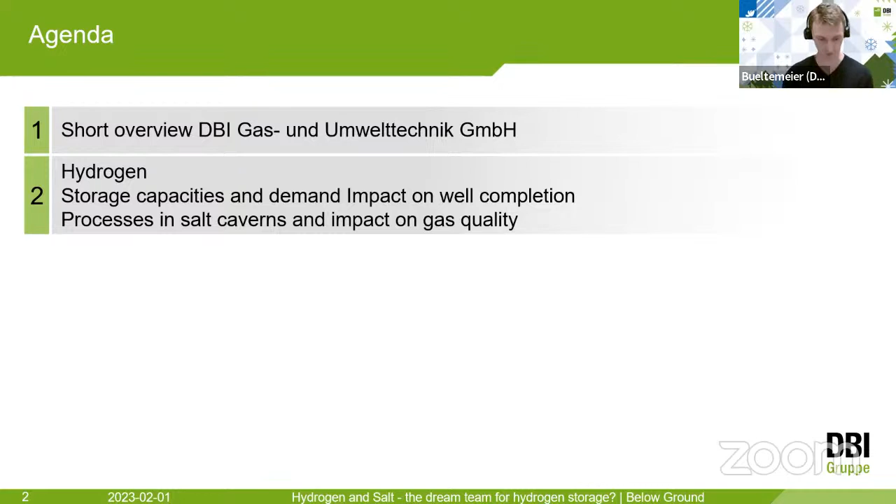The presentation is split into two parts: a very brief short overview of our company and recent activities, and then the big one, hydrogen underground storage, with two distinct focuses - hydrogen storage capacities, and how this impacts our wellbore completion and the caverns themselves - with then in the end a link to the surface facilities where Lorenzo is going to take over.

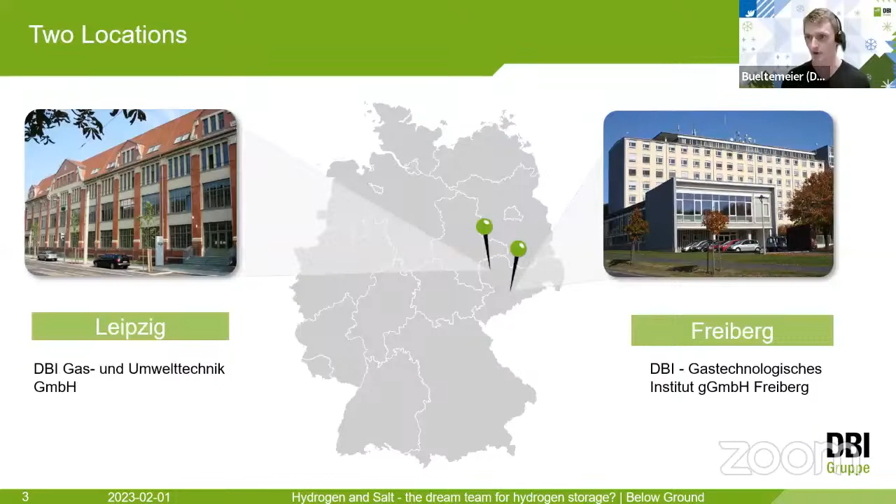Just a few words about our company. We are a small and medium-sized enterprise located in Leipzig. We are a research and development entity, and we also do fundamental research, the latter under our subsidiary, the Gas Technological Institution, which is located in Freiberg, where I myself am also located.

As a company, we always aim to cover the entire value chain of gaseous energy supply. On this screen on the left-hand side, you see a bit of our topics that we work on, but it's just an excerpt, not limited to that, but where we dominantly put hydrogen, and the weight, the balance shifted more and more to renewable energies - that's just what the market demanded. And of course, with our research activities, we always want to stay on the forefront of the developments.

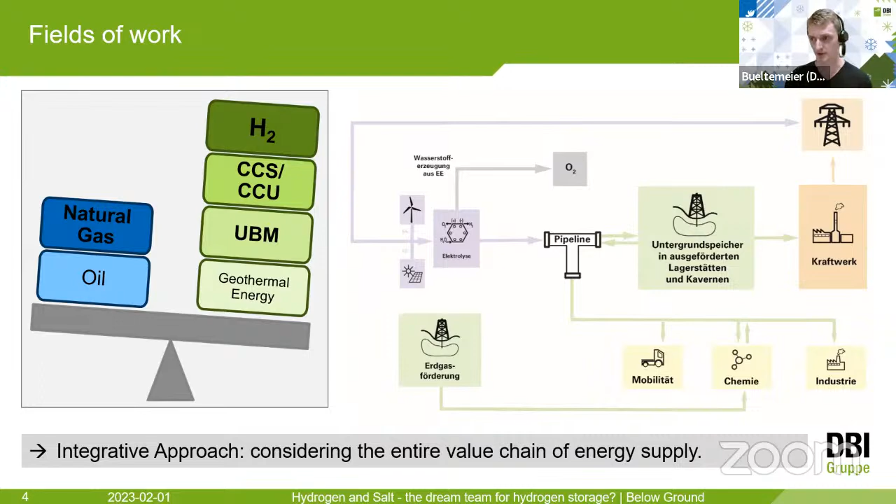On the right-hand side, I showed a brief chart on hydrogen, or general gaseous energy supply, from production to distribution to storage to utilization. And very dominantly, I put the underground storage facilities in the middle of it because we consider them a vital backbone, in also the current energy system, but also in future energy systems with renewable hydrogen.

One very recent example of that in the practical real world is the REAL - in Germany we call it Reallabore. You might have heard this term, real labs, loosely translated in English as large research project, but in an actual cavern on hydrogen underground storage as a backbone for regional energy supply for various customers, the first one of this kind.

Currently, the works are ongoing in the surface facilities, but then in 2025, we will start with the below ground works and have the cavern ready by 2026.

Very nice event. Okay, let's get started into the main part. This slide you might pause by yourself when reviewing the stream afterwards. Just some political figures on why hydrogen is important. For this presentation, I will just go over it.

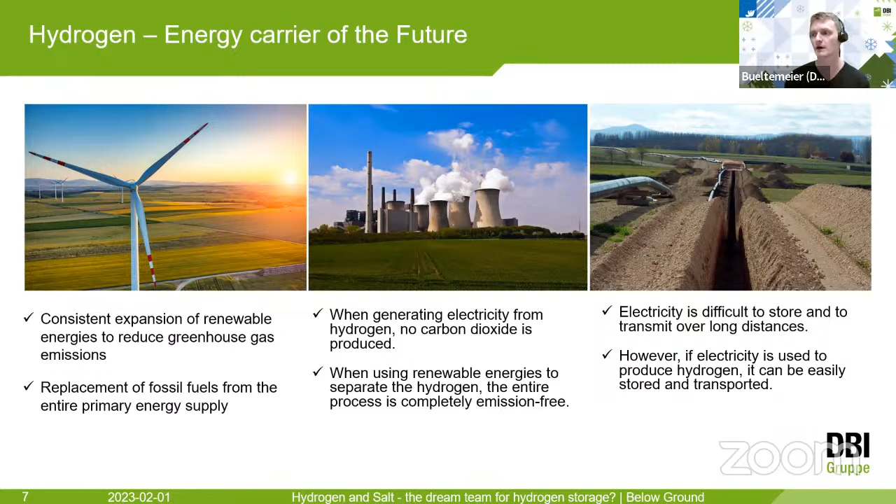But why do we talk about underground storage in particular? What I put here in this chart, borrowed from colleagues around Mr. Sterner, are different storage possibilities. Plotted on the y-axis are the achievable withdrawal durations versus on the x-axis, the overall storage capacities.

There are different options: heat storage, capacitors, pump storages, and in those red bubbles, the underground gas storage facilities. All of those bubbles look more or less of equal size. However, please consider that the scales X and Y are both logarithmic. If you would linearize this, it would be just one large red bubble, so to say.

And this really brings us to the answer of the question, why? It is simply that for regional and long-term energy supply, and as a backbone for industries and entire regions, we really need large capacities in the terawatt hours range. When we're talking about those things, we almost exclusively end up with geological storages.

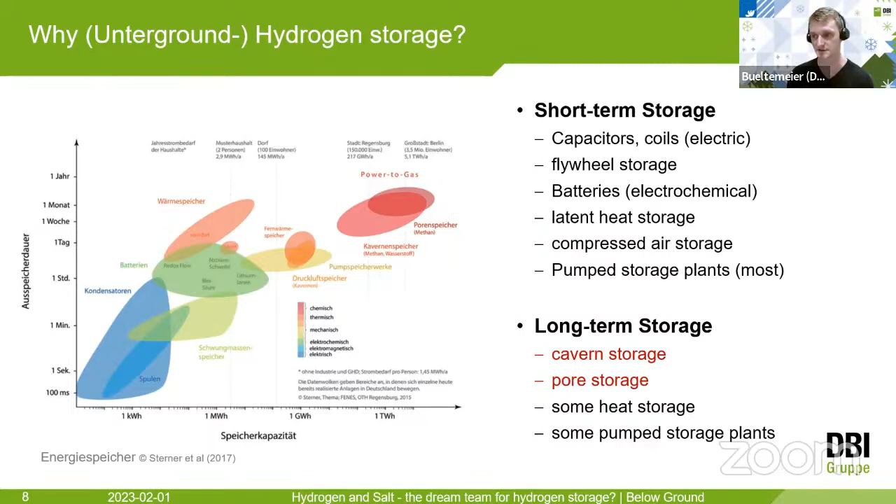This slide, for the course of this presentation, I also go over very briefly. You might pause the stream if you like, or during upcoming review. Some characteristics, the main characteristics of the two different types, porous UGS and cavern UGS. I highlighted in the cavern UGS those features that make them particularly interesting for hydrogen storage.

Easy adjustable withdrawal and injection rates, by means of tubing diameters or simply number of caverns. Lower effort for gas treatment, and very flexible in terms of operations - they can easily switch from injection to withdrawal and vice versa in very short term.

The porous UGS facilities are more on the baseload application side, and it's also very necessary that we consider them in our investigations and considerations as well, because some countries simply don't have salt caverns. But yeah, salt caverns are of particular interest.

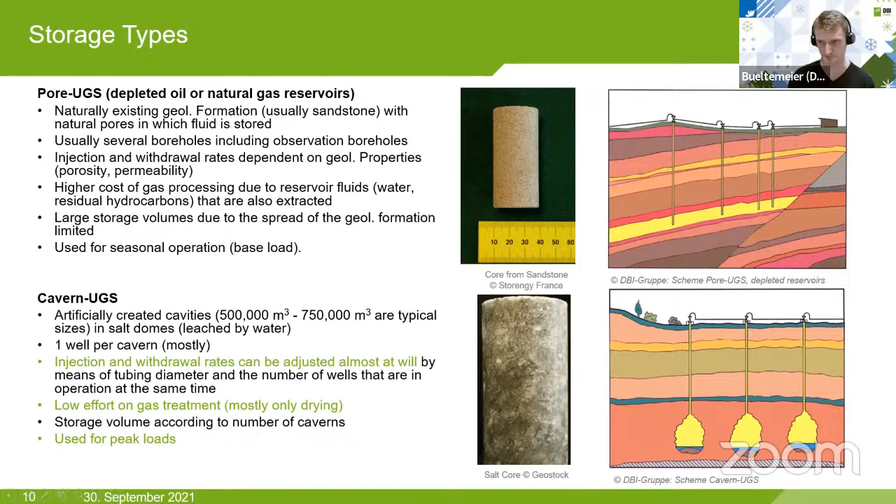Okay, why this focus? I partly answered it already - this question, why salt and hydrogen may be the dream team for storage, is a question raised from a mostly German perspective. Germany in the European Union has the largest natural gas storage capacities, and most dominantly, the largest share of it is in salt cavern UGS facilities. That's a rather unique case compared to Europe or worldwide as a whole.

There, the split is just the other way around - porous UGS facilities are most dominant in basically every other country, up to the point that some countries don't have salt caverns at all. That's also the reason why in Germany right now we are focusing on those caverns when it also comes to the first real-world projects like the Reallabors.

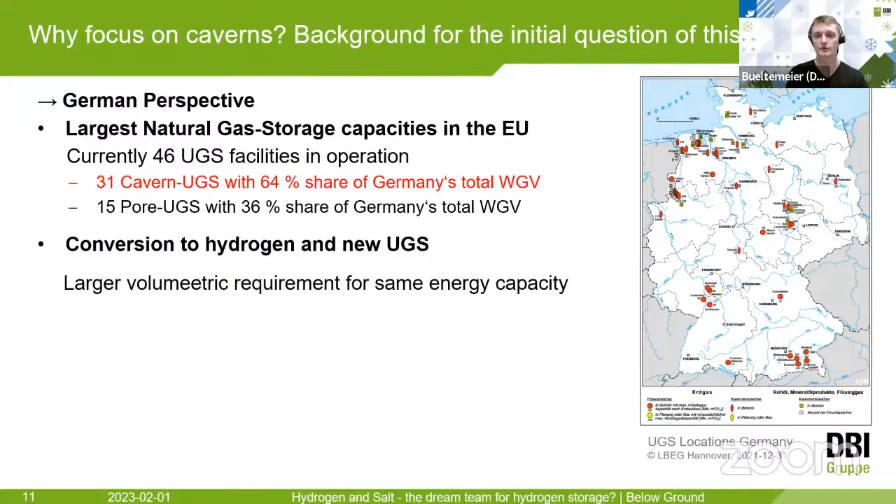But what happens when we convert an existing natural gas storage facility to hydrogen? First of all, for the same energy that we want to store, we need a larger volume. This is reasoned by the heating value that natural gas and hydrogen has - natural gas has approximately 3.5 times the heating value of hydrogen.

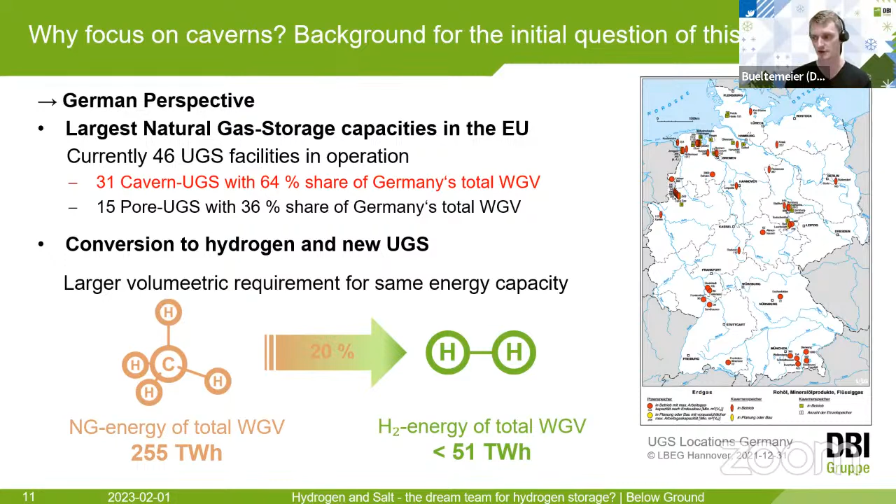And also in terms of just volume, we can store less hydrogen volume in the same UGS facility under the same operating pressures than natural gas. Why is that? Let's briefly get into some mathematics here.

This can be calculated by taking a look at the real gas equations and working out the working gas volumes for natural gas and hydrogen under the same pressure and temperature conditions, but for both gases with their individual Z factors. By comparing the volumetrics, we end up with a factor of 1.6, that hydrogen storage volumes are lower than natural gas storage volumes just due to compressibility. And when applying the heating values, we get again a reduced energetic storage capacity. That's why this 20% is given here.

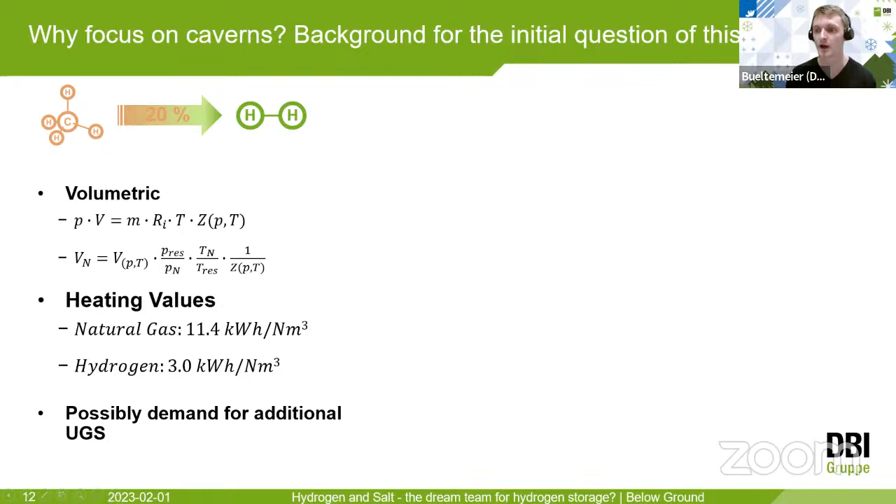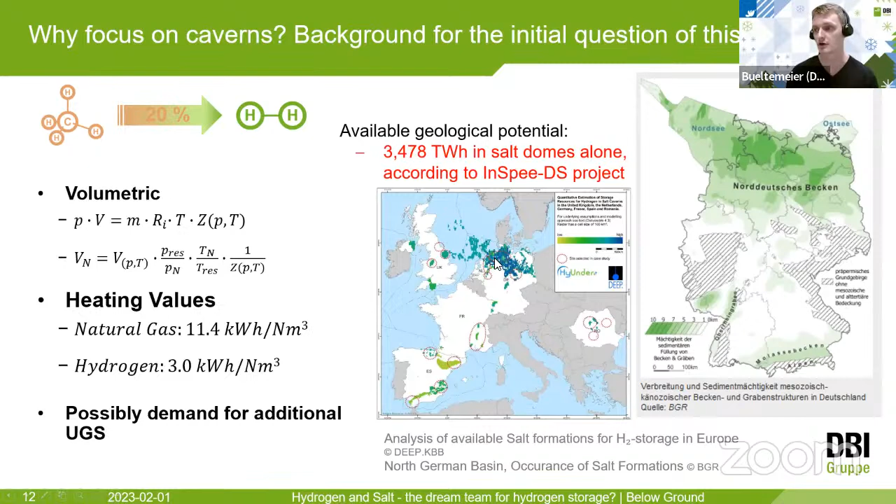So, but how much energy, how much hydrogen storage capacity do we need at all? This largely depends on the demand and how the future energy system will look like, and who are the customers and the utilizers and so on.

Here we can take a look at the long-term scenarios by the Federal Ministry of Economics and Climate, who compiled 3 different scenarios until 2045, and it's somewhat in the range of 47 to 73 terawatt hours hydrogen storage capacity, not consumption capacity. Depending on which number turns out to be the actual one in reality, we definitely would need to either convert all of our facilities and or even establish new ones.

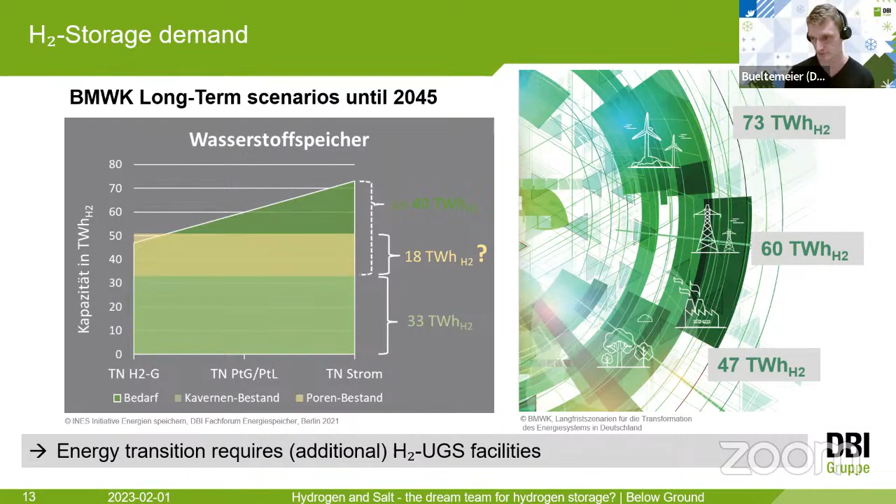Okay, but what does the hydrogen then make with our wellbore installations and the caverns? Let's take a look at the wellbore installations firsthand.

The rather obvious item is that our pressure development in the well will change, since hydrogen is a much lighter medium than natural gas is. And of course, you always have a static column depending on the bottom hole pressure of the reservoir, the operating pressure, the gravity of your gas, and so on. And then you can calculate your wellhead pressures from that.

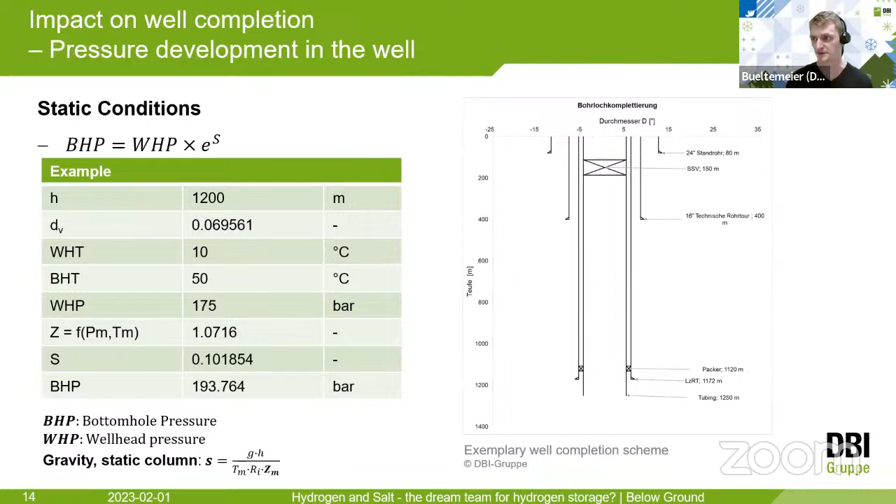The same can be said if you are in actual operations for injection or withdrawal. There you have the static column as well, but also your dynamic friction losses. To visualize this briefly, depending on if you're on the withdrawal side or the injection side, your pressure behavior in the well changes. So far, so good—this is the same story for natural gas and hydrogen.

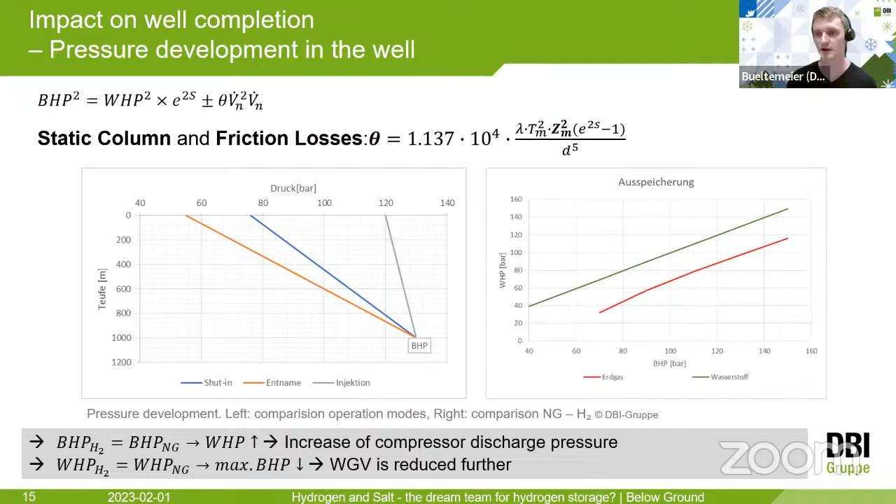But since hydrogen is a much lighter medium than natural gas, we can take a look at the right-hand side for comparison. What we quite clearly see here is that for the same bottom hole pressure, we always end up, regardless of where we are, with a higher wellhead pressure. This has a profound impact on our above-ground installations, in particular during injection on the compressor discharge pressure. And in case a compressor cannot deliver the new required maximum wellhead pressure, then we can even store less volume.

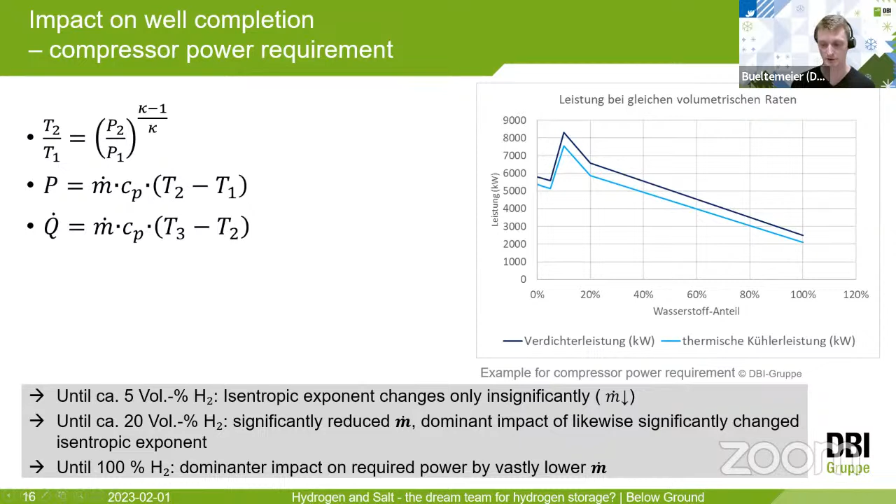However, in between, the impact of the isentropic exponent is much more significant, and that's also the reason why the power requirement has this significant peak here, which seems a bit odd if you just look at it. Okay, here's some explanation about the variables.

Long story short, we end up with a different pressure and a different load in the wellbore, which means we need to take a closer look at the stress our wellbore experiences—radial, tangential—and in the end develop an equivalent stress calculation. The Mises approach is very common here for subsurface applications.

We need to reevaluate our safety factors. If we have different loads in the well, we need to see if the previous safety margin for natural gas storage is still given. We are now in the field of converting existing facilities. Of course, when you build a new one, you would design from scratch.

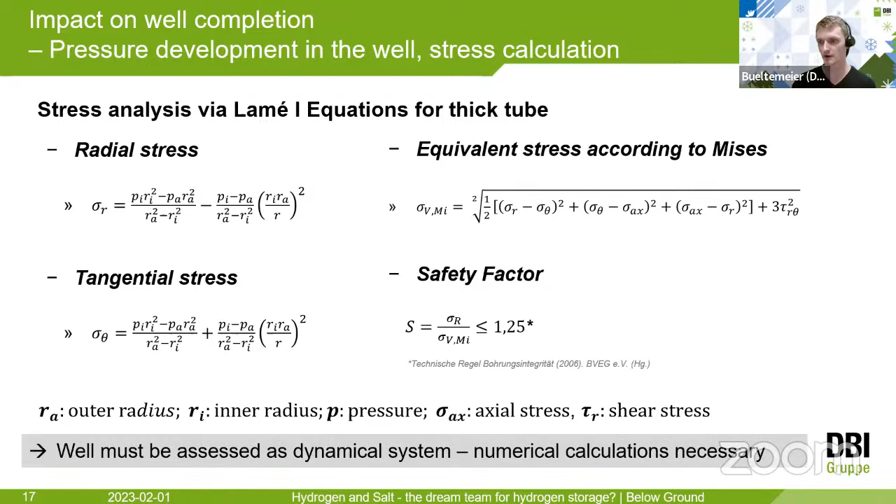For such assessments, you can build numerical tools for very dynamic considerations, combining the wellbore, the cementation, and the surrounding rock—inner stress, outer stress, and so on. It's a rather complex calculation over the length of the entire wellbore.

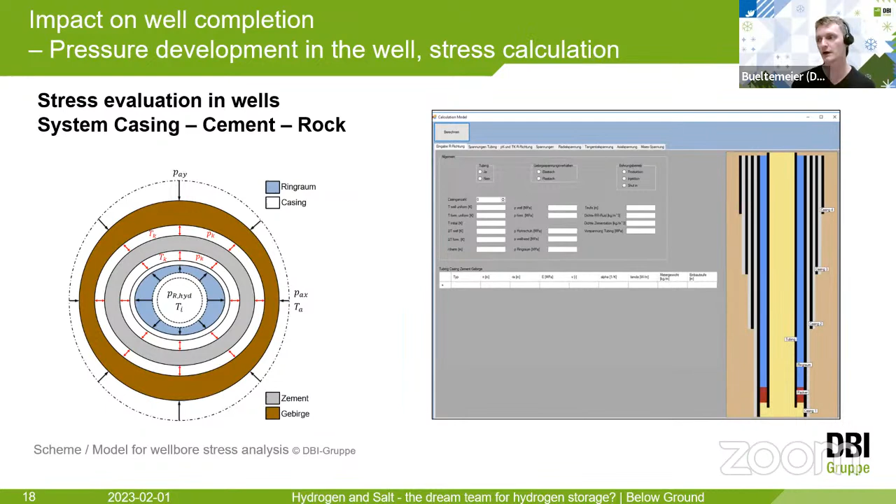I just put here a screenshot from an example model that we usually use and feed with different input data. After the wellbore—and I know it's very brief, sorry for that—we need to take a look also at the caverns themselves and how the salt reacts to our storage operation.

It is very likely that storage operation becomes much more multi-cyclic in the green hydrogen world compared to natural gas, because wind is not always blowing, sun is not always shining—it's very fluctuant. This means we need to utilize different injection and withdrawal patterns compared to natural gas, where we have an annual cycle.

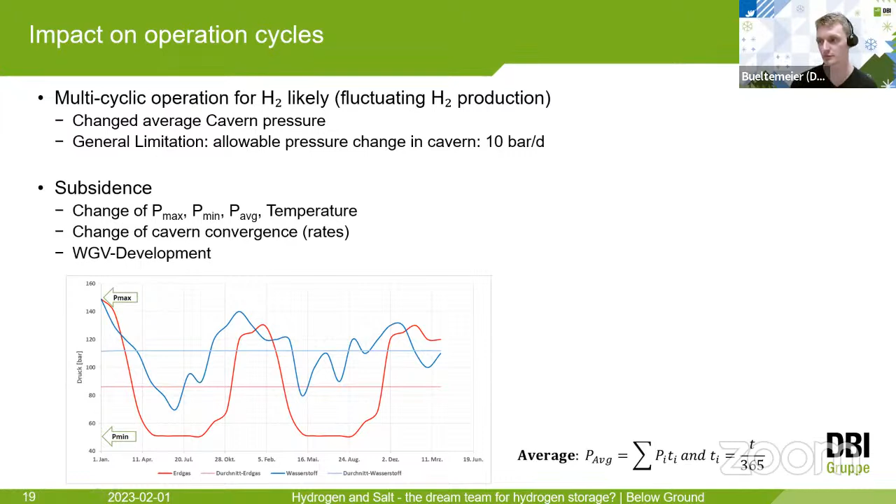This change in the average cavern pressure has a profound impact on cavern convergence and also on surface subsidence resulting from cavern convergence. We can go into more rock mechanical details if you have particular questions about it. Right now, I can only mention it.

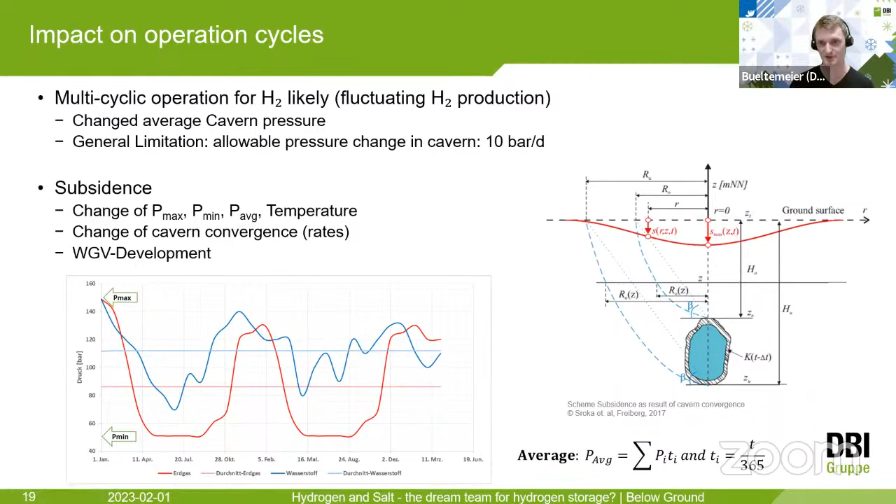But speaking of rock mechanics and cavern stability, we also need to make some additional assessments there, since our salt cavern needs to provide long-term stability. We need to determine our minimum and maximum operating pressure.

We need to determine how many caverns we could put in the salt dome, what distance they need from each other, what distance they need from the caprock, and so on—just to stay safe mechanically, and also stay technically tight, providing safety against uncontrolled gas migration from the cavern to anywhere we don't want to have it.

This is usually done by lab testing from core samples. I put here some charts from a finished research project called H2UGS, where we did such lab testing accompanied with numerical simulations from a partner institution of ours, investigating different loads on various critical points of the cavern.

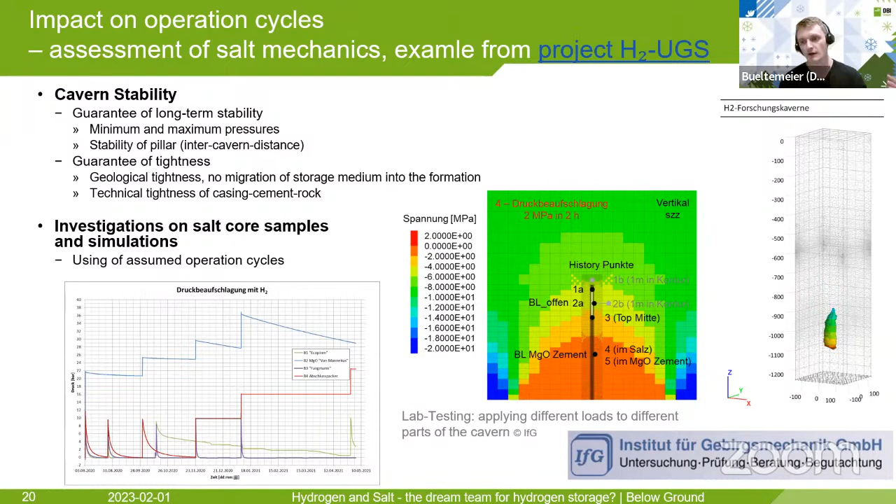Salt in the cavern itself, at the very top of the cavern, and cement at the LCCS—maybe detailed questions later on that. Those load cycles had been applied to the anticipated operating cycles to represent them.

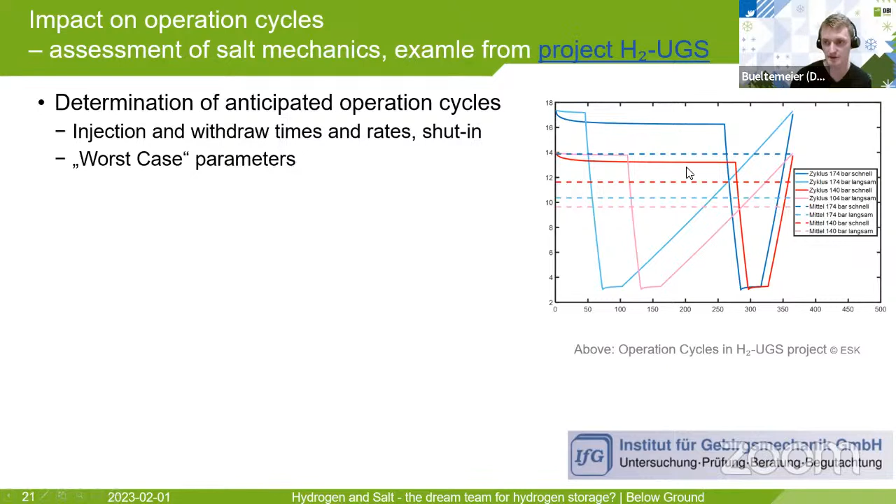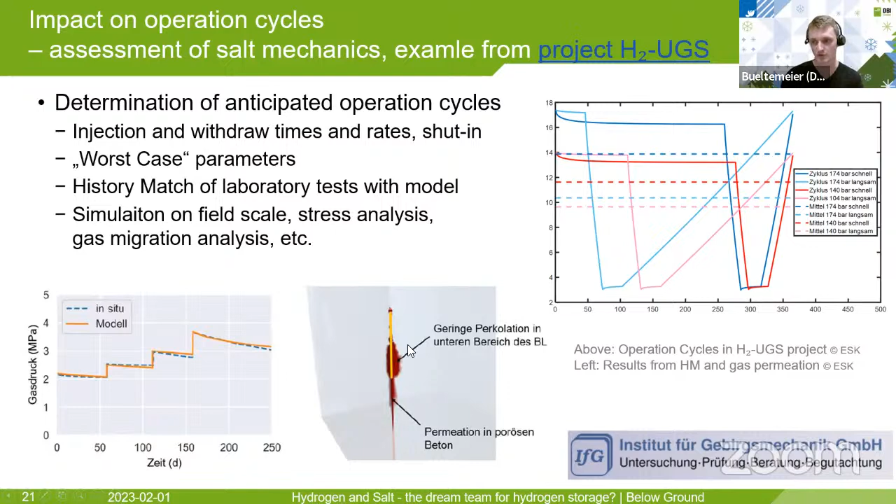What you need to do then is history-match your numerical model with the laboratory data, and then scale it up to a real cavern model, including also the surrounding rock. Then you can analyze your stress and also analyze other things like gas migration into the rock matrix, an example I just plotted here. Then you can work on your operating pressures and loads and so on.

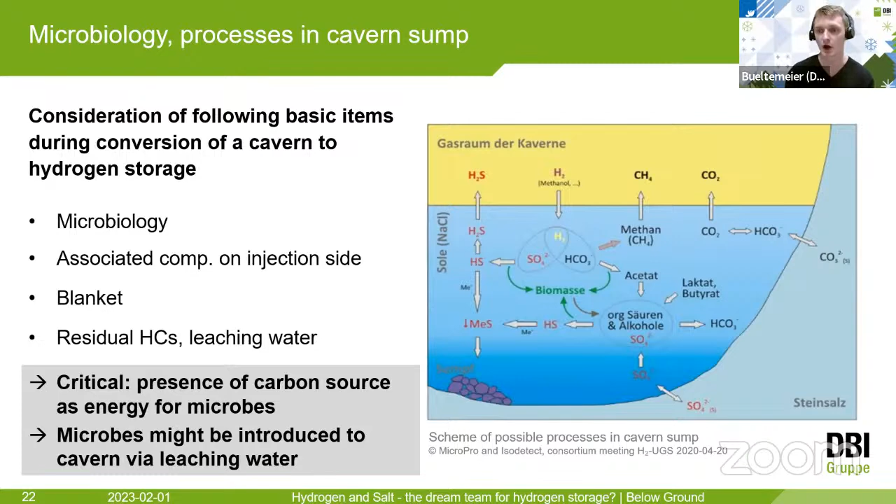But those processes can be triggered by the availability of a carbon source, which serves as a nutrient to microbes, and then some conversion processes can go on that we don't want to have. It's important to consider this when converting a previous natural gas cavern, or an oil cavern, or if you use the diesel blanket during the leaching process during construction.

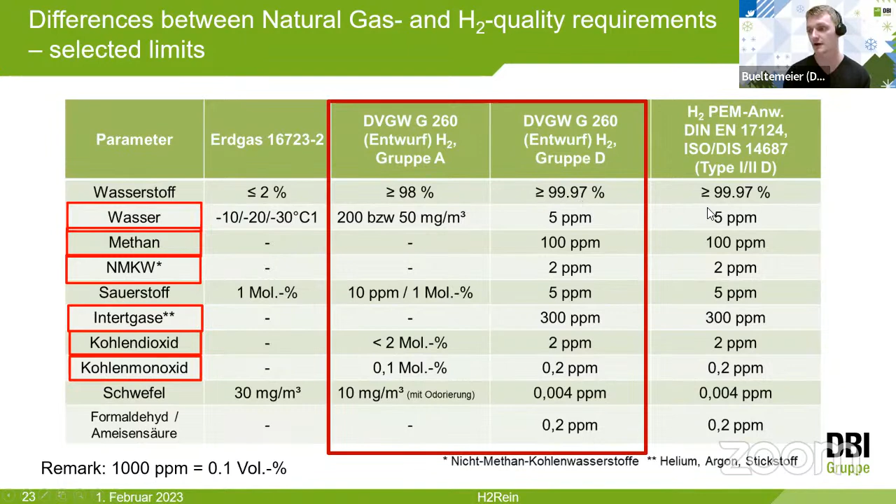This again has an impact on the necessity for gas treatment. There are different quality grades in current discussion in Germany: grade A and grade D. Grade A is rather easy for common methods of treatment to achieve, but grade D, when we're looking into purities of more or equal to 99.97%, it's really getting a bit more tricky.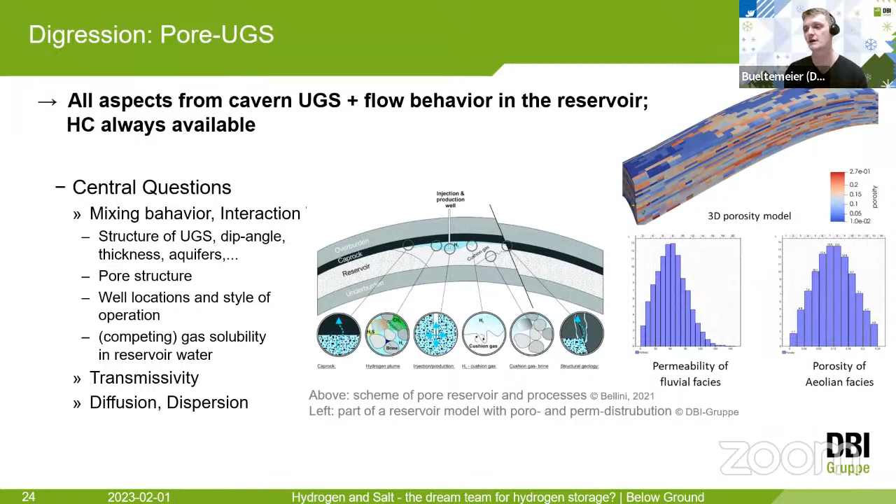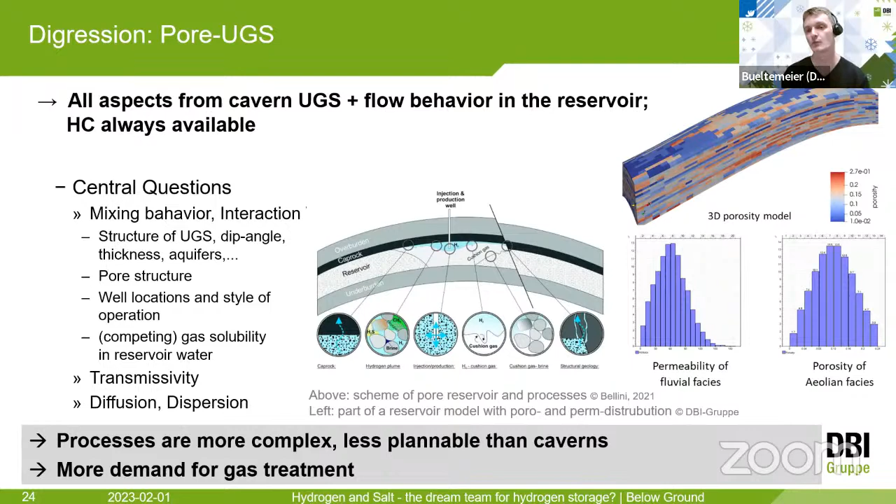So, is this exclusive to caverns? What about porous UGS facilities then? Just a quick distinction: we have all the considerations that we need to undertake in caverns, and also the flow processes in porous media. Overall, porous UGS facilities are much more complex to analyze. It is necessary to do that, but salt caverns are the easier storage type, a more flexible storage type.

And to wrap up, here's just a picture of the ongoing activities in Germany, lots of real labs, Bad Lauchstädt being the one on the cover photo, and some others here in North Germany, obviously, but there are also others in the Netherlands, in France, and other countries as well.

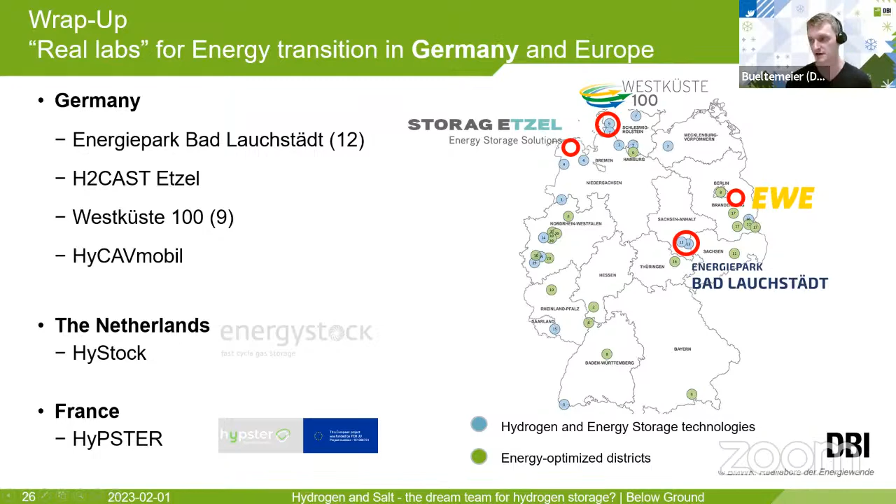Maybe I'll just give you 15 seconds to take a look at those bullet points here to wrap it up. My point of view is there was a lot of fundamental research going on in the last years, and we are currently at the point in time where it's simply necessary to get into the field, make new experiences there, and push the topic forward.

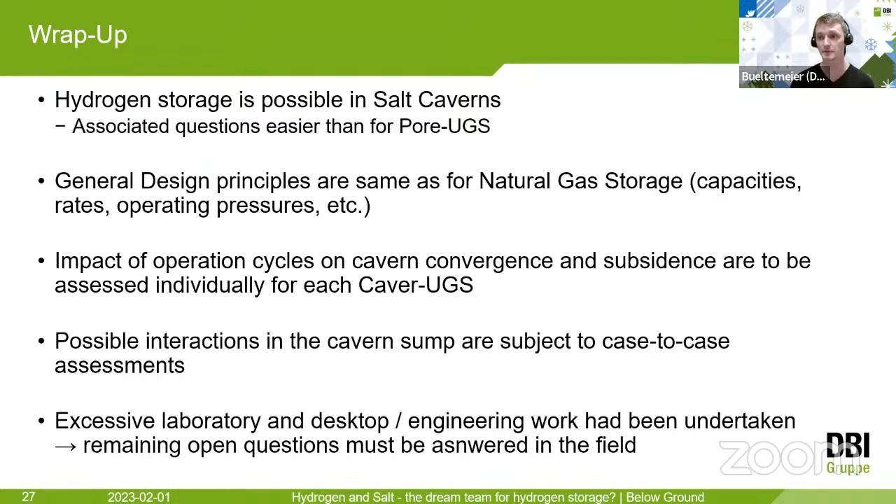And with this slide, I mentioned it in the previous ones: gas treatment and compressor. Those are the links to the above ground installations. And without further ado, this shall be the transition slide.

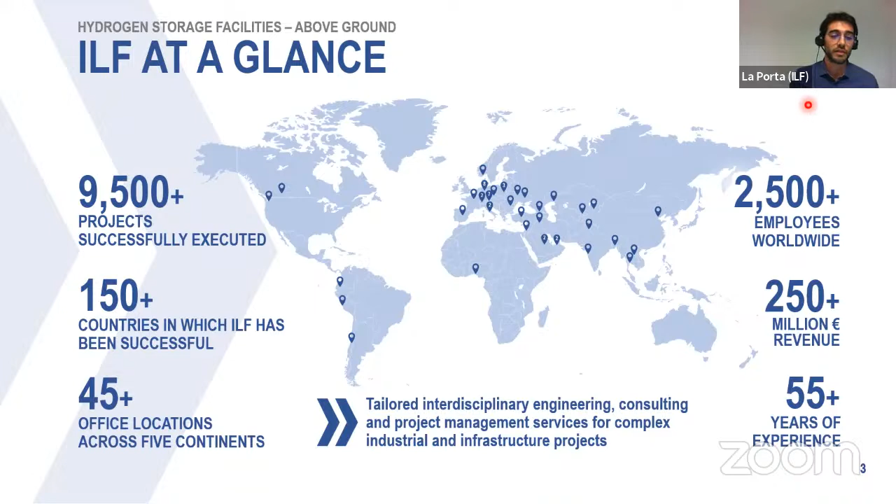ILF is an international engineering and consulting company, active in more than 150 countries with more than 45 offices around the globe, 9,500 projects successfully executed over more than 55 years. We operate in 4 main business areas with more than 2,500 employees and 250 million euro of revenues. We are active along the whole hydrogen value chain.

Why hydrogen value chain? Because green hydrogen generation starts from renewable energy production. Then it's important the transmission of energy, and important the desalination to provide desalinated water to the electrolyzer. Then the hydrogen production itself can be later converted into green derivatives. It can be stored, it can be exported. Here I mentioned some projects ILF has been working on relative to the whole hydrogen value chain.

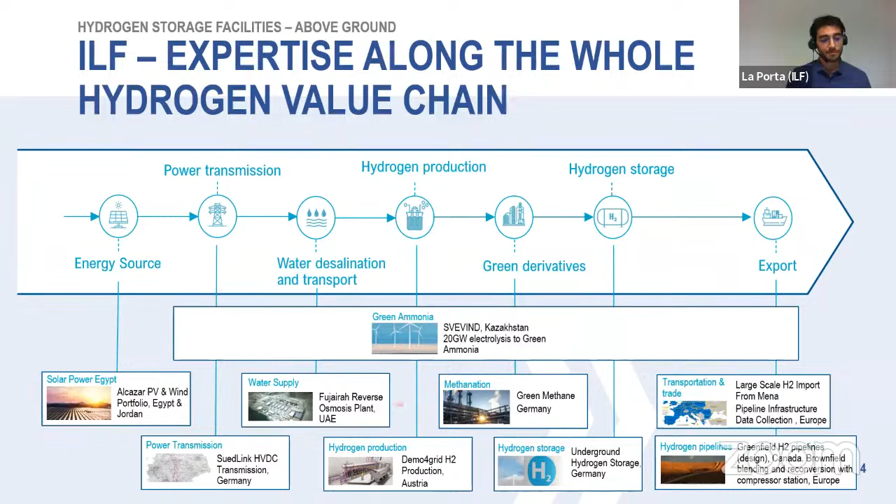Well, why do we talk about hydrogen value chain? Hydrogen is an energy carrier that can be used to store renewable energy in its chemical structure. It can be reconverted into electric energy if needed, and transported in different forms, also over long distances. Because of the fluctuating nature of renewable energy production, and therefore hydrogen production, daily and seasonal hydrogen storage is necessary. That's why we're talking about hydrogen storage, and in particular about the above ground facilities of an underground hydrogen storage.

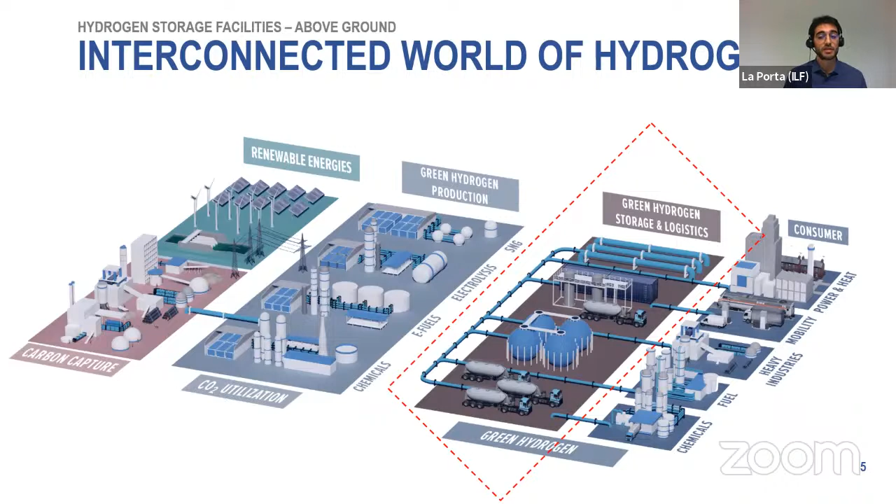So let's first look at the facilities needed for an underground natural gas storage to better understand the standard technology, and then we'll look at the differences required for hydrogen storage, to understand what it takes to reconvert an underground gas storage to an underground hydrogen storage.

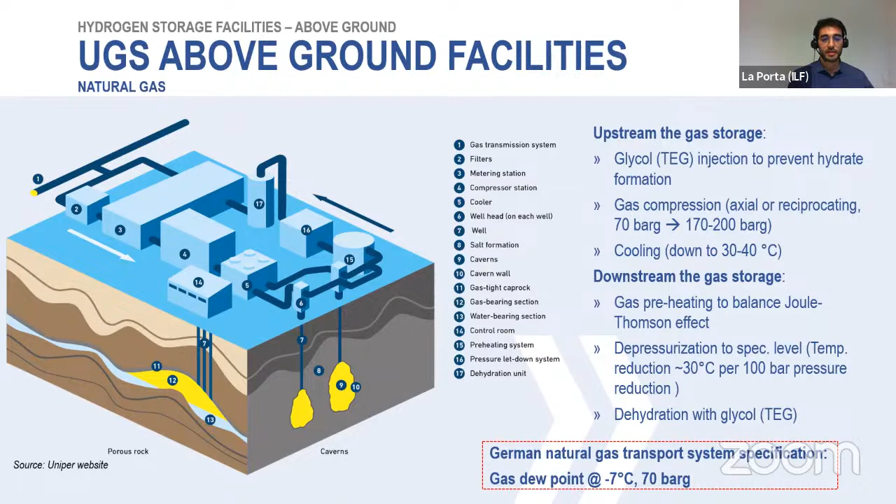Now let's look at the underground hydrogen storage facilities and see the differences. The main differences between hydrogen and natural gas storage above-ground facilities relate to the compressor type, the fact that no preheating is needed before depressurization because the Joule-Thomson effect for hydrogen is different - a pressure reduction leads to a slight heating of the gas rather than cooling like natural gas - and the different dehydration technology that can be utilized. The type of facilities mainly depends on the type of underground gas storage and the specification regarding hydrogen quality.

As described before, there are different kinds of underground storage: salt caverns, depleted oil and gas fields, and I added lined rock cavern, an artificial cavern that could be used in specific cases. The hydrogen quality specification depends on the end user. For example, the gas network has a dew point specification of -7 degrees at 70 bar G, which could also apply to hydrogen. Whereas if the end user is a fuel cell plant, we'd have a different hydrogen purity requirement, typically higher than 99.9% mole purity on a molar basis.

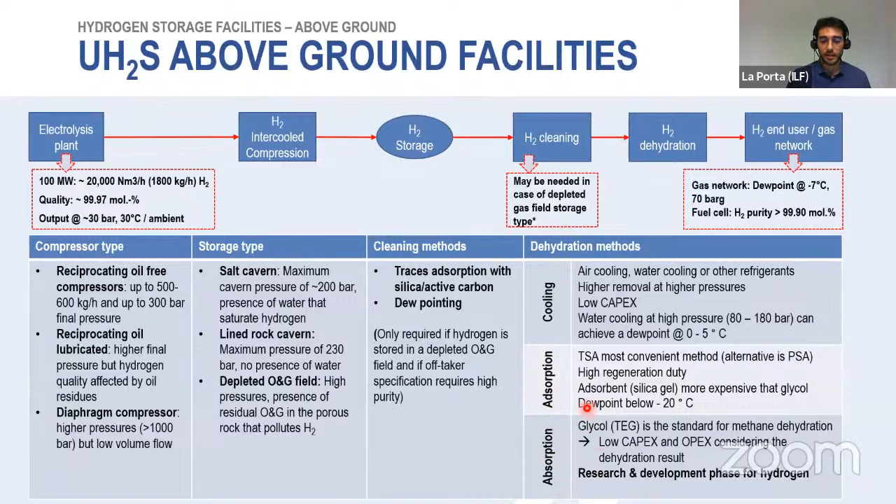This is a typical example of hydrogen storage facilities. We at ILF have been working on this kind of project, so let's see what we have here. After the electrolysis plant, hydrogen goes into a buffer, whose main purpose is the startup, to match the startup of the electrolysis plant and the compressor.

We then have the compressor unit, intercooled, which is typically a reciprocating compressor. Hydrogen is then stored, in this case in a salt cavern. When extracted, it can be cooled down at high pressure, and water can be separated with a separator. If a lower dew point is needed, a temperature swing adsorption unit can be added before delivering hydrogen to the end user.

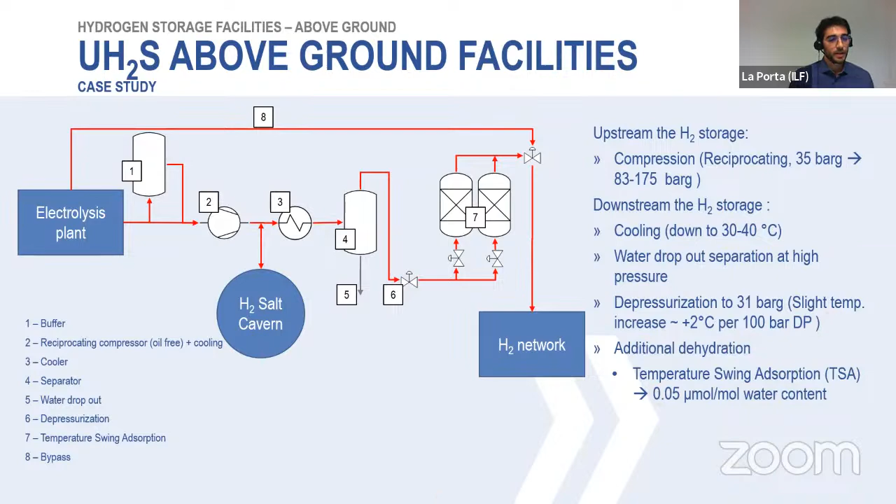Very good. So I tried to wrap up these questions, which I received many times, regarding reconversion of underground gas storage facilities to hydrogen.

Let's see the first: can a natural gas axial compressor be utilized for hydrogen? The answer is no. An existing axial turbo compressor cannot be used for hydrogen because of the different physical properties. As I said before, a new generation of axial compressor is being developed and will be available soon.

Whereas if our underground gas storage is using a reciprocating compressor, could this compressor be reused for hydrogen? This option could be possible. Of course, the compressor will not operate at the optimal design condition, but definitely the option could be considered.

Let's now have a look at this question regarding dehydration. So if we have existing drying facilities for natural gas, would it be possible to reconvert these existing dehydration facilities for hydrogen?

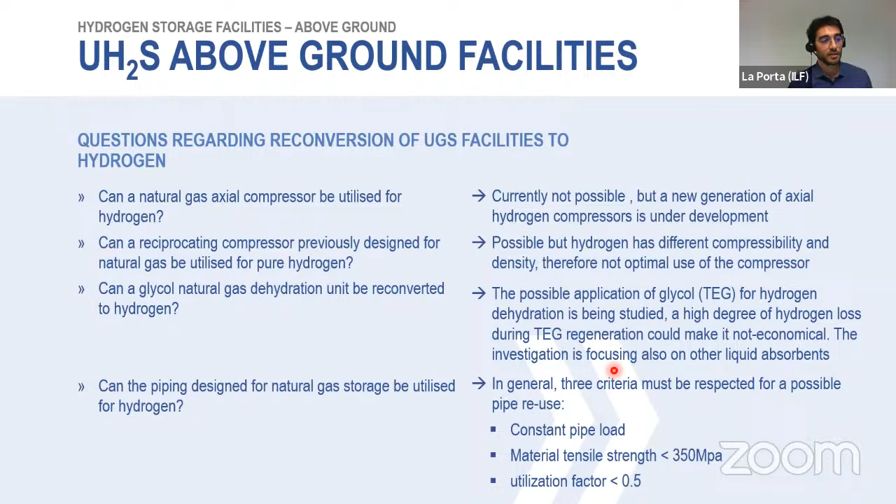The pipes would need to be used at constant loads, made of soft metal with a tensile strength lower than 350 megapascal, and the utilization factor would need to be less than 0.5. If these criteria are not respected, then further investigation should be performed. And in case the investigation gives a negative result, then the pipes would need to be replaced.

This is an example ILF has been working on. We've been doing the conceptual design and the basic engineering for an underground hydrogen gas storage, a small one. We see here the capacity of 17,000 cubic meters, quite smaller than the capacities Hagen mentioned before.

The purpose of this storage was to store hydrogen for a 30 megawatt electrolysis plant. With this maximum cavern pressure of 175 bar, the compressor unit can process up to 6,000 normal cubic meters per hour, two stages intercooled, with 0.7 megawatt peak compression power, and the dehydration unit could reach this dew point specification: 5 degrees C at 31 bar G.

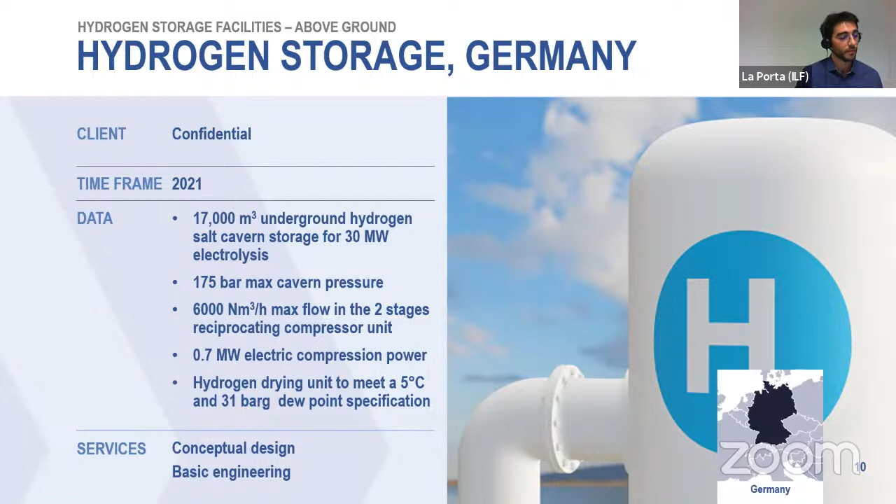So conclusion: the challenge related to above ground hydrogen facilities needs to be addressed, so that the type of above ground facilities depends on the kind of underground storage. That's the first thing to be considered, and that's the main parameter, the main point that will determine the kind of facilities.

Then another challenge is the reconversion of previous natural gas storage into hydrogen storage. The reconversion may require substituting at least the compressor and the drying units. The technology to process high amounts of hydrogen in the same order of magnitude as natural gas is still under development, and now I'm talking about the compressor unit and the dehydration unit.

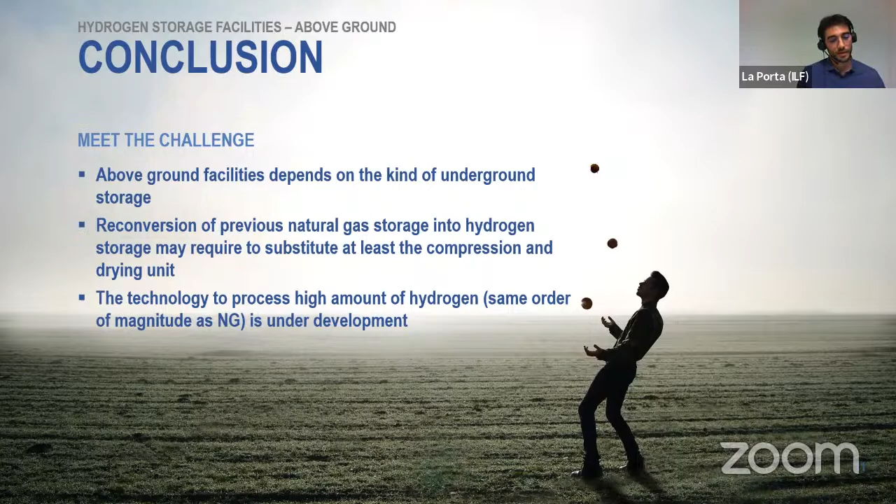Okay, Lorenzo La Porta, thank you very much for this very interesting presentation. Now we do understand that this is quite a challenge to convert natural gas storage facilities, also the above ground facilities, into a hydrogen storage facility. But nevertheless, the work is on the road, and we will see in the years to come that this technology and this challenge will have solutions available. With this, let's come back afterwards when we have a short roundtable discussion with all of us.

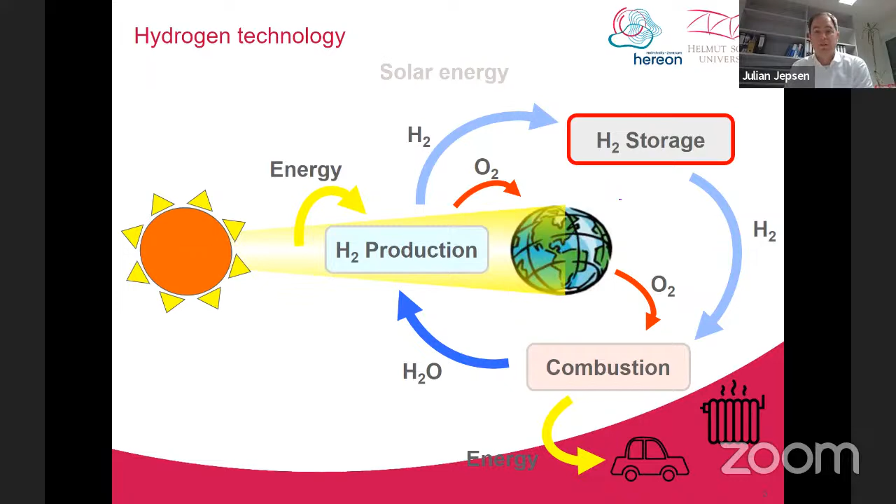I'll skip the introduction because obviously hydrogen technology is of key interest for all of us. I just want to point out that hydrogen technology is complex but doable, as was also seen in the presentation before. Some challenges remain, particularly for hydrogen storage, and here hydrogen storage by metal hydrides can be a solution, at least for some applications.

Natural gas and gasoline energy carriers are very high concerning their volumetric energy density. This cannot be reached by lithium-ion batteries, for instance, but it also cannot be reached by hydrogen, even though hydrogen from a gravimetric point of view has the highest energy density. This is all for standard temperature and pressure conditions, and the idea or challenge of storing hydrogen is to increase the volumetric energy density without losing too much of the gravimetric advantage. Hydrogen storage in general can be done with different approaches.

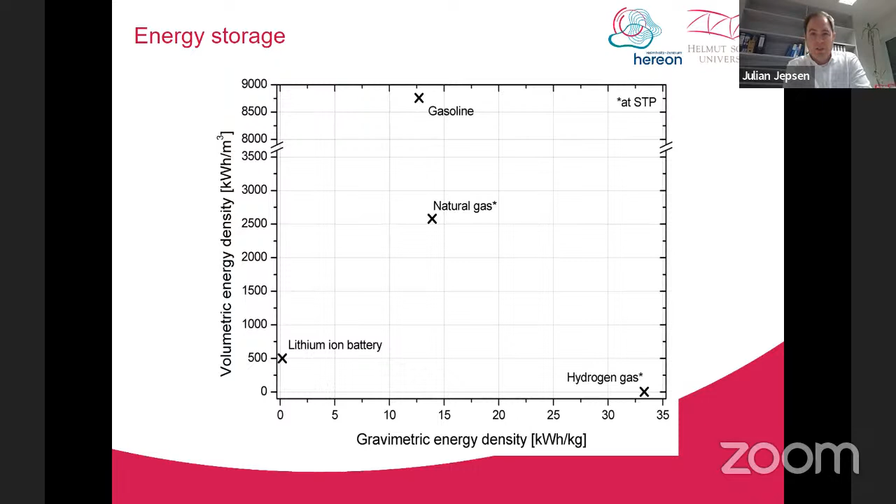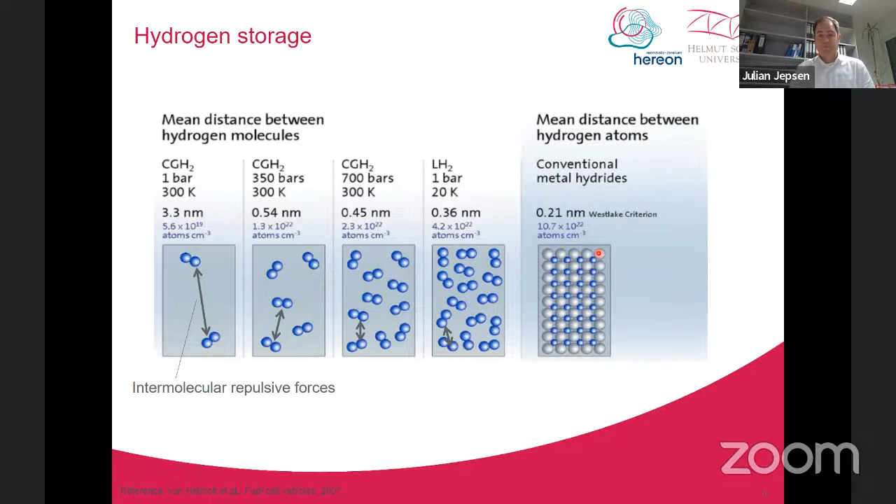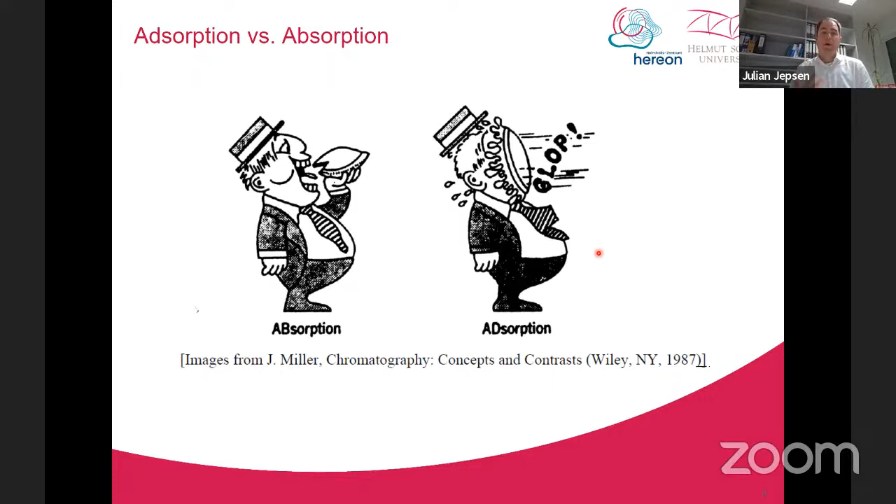It's very important to distinguish between absorption and adsorption, shown here. Adsorption is a typical process where you physisorb something on the surface, but now we're talking about absorption, where the hydrogen really diffuses into the metal lattice. How does this work? Briefly, there's an interaction between the hydrogen and the metal, or host material. First some adsorption takes place on the surface, but once the hydrogen splits into two atoms, it diffuses into the metal and finds its place inside the lattice and host material.

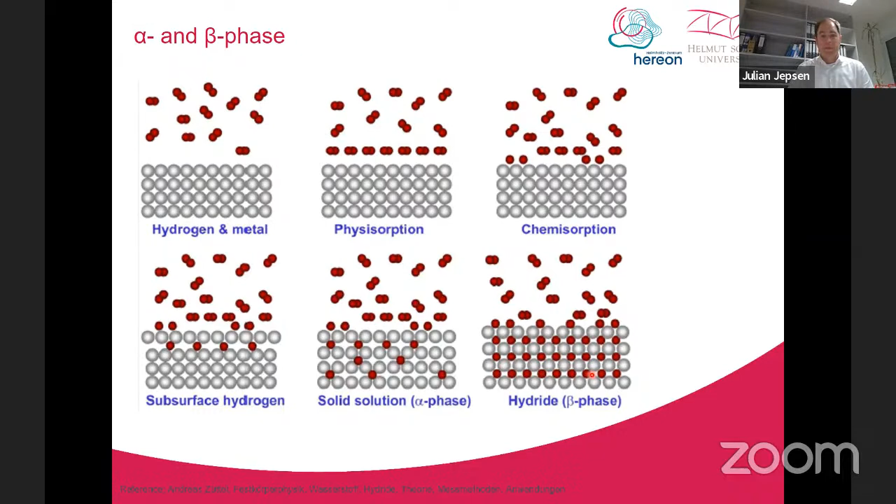This happens at a so-called thermodynamic equilibrium, so it doesn't need further pressure. You have to initially increase the pressure, but once you reach thermodynamic equilibrium, just with a slight overpressure, you get the full capacity of material that can be stored.

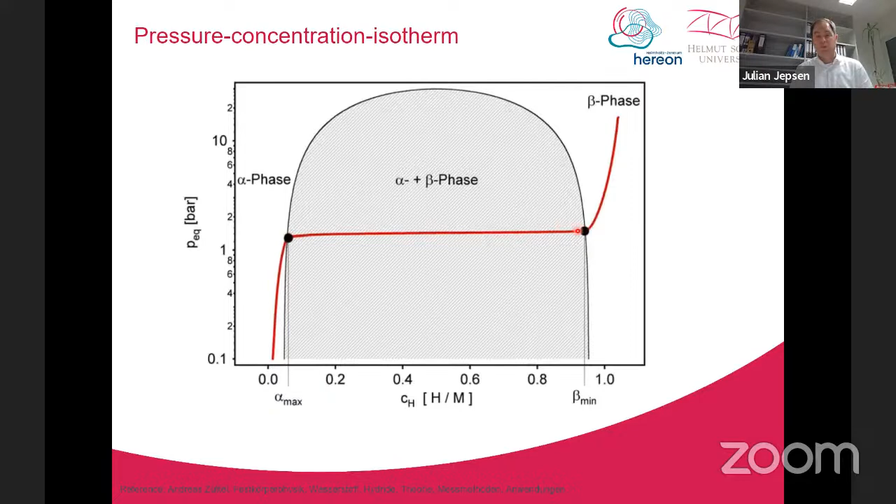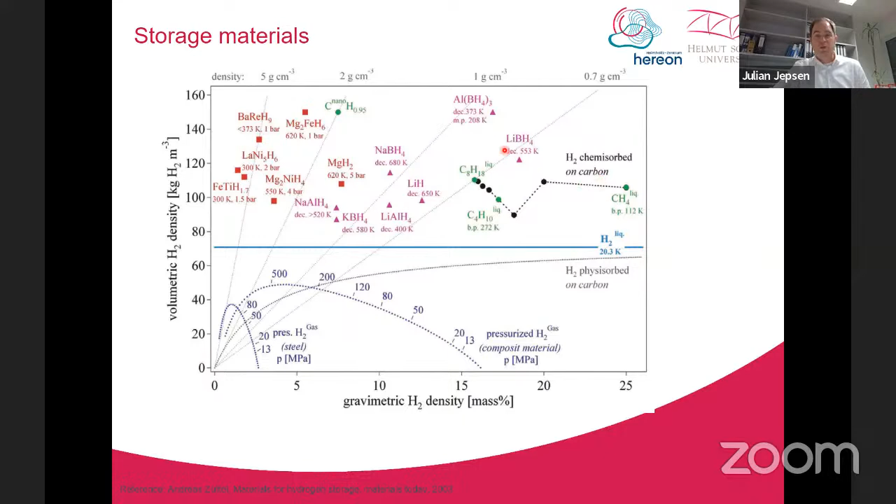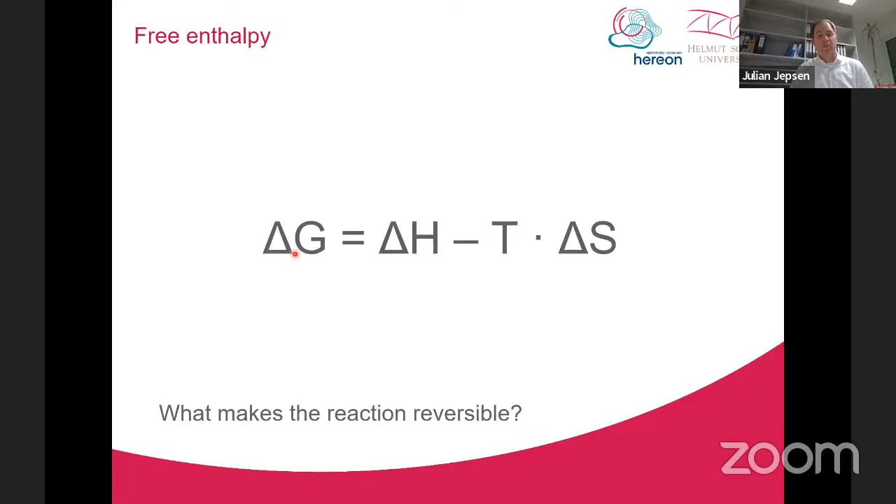So a little bit about the thermodynamics. How does it work? This is shown by this equation, which combines the reaction enthalpy, delta H, with the reaction entropy. Delta G is the combination of both, the free enthalpy, and whenever delta G gets negative, the reaction occurs spontaneously.

So how is this possible? During absorption, we have a negative entropy because we're changing from a chaotic orientation in the gas phase to a well-ordered orientation in the solid phase, and this usually comes with negative entropy. So this term gets negative, and with the minus sign it has a positive contribution. However, due to a negative delta H value — because absorption is an exothermic process — we end up overall with a negative delta G value. Usually the contribution of the enthalpy is much higher than the contribution of the entropy.

But if this is the case, for desorption — the release of hydrogen — everything works the other way around. During desorption we now have a positive contribution: the hydrogen goes to its more favored state, the gas phase, and we have a positive contribution from the entropy.

So with this negative sign here, we get a negative contribution to delta G. However, as I mentioned, if the absorption is exothermic, the desorption is an endothermic process, so we have to provide heat for this reaction. And since the contribution of the enthalpy is still higher than that of the entropy, we end up with a positive value for delta G.

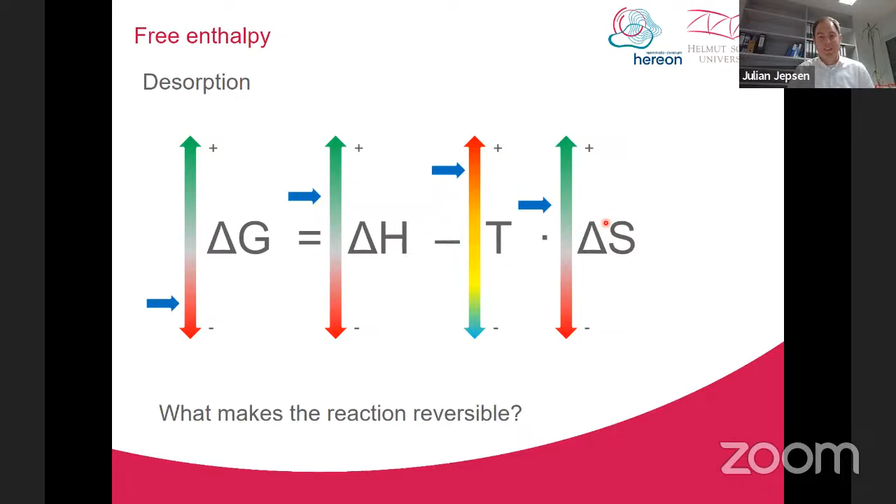What we just saw is basically without any effect of pressure. If you draw a straight line here, increasing the temperature, on the x-axis, leads to desorption, while at lower temperatures you are in the absorption region. In real life it's a bit more complicated because pressure also matters, but it's just as simple as with temperature: at low pressure you're desorbing, and at relatively high pressure you're absorbing.

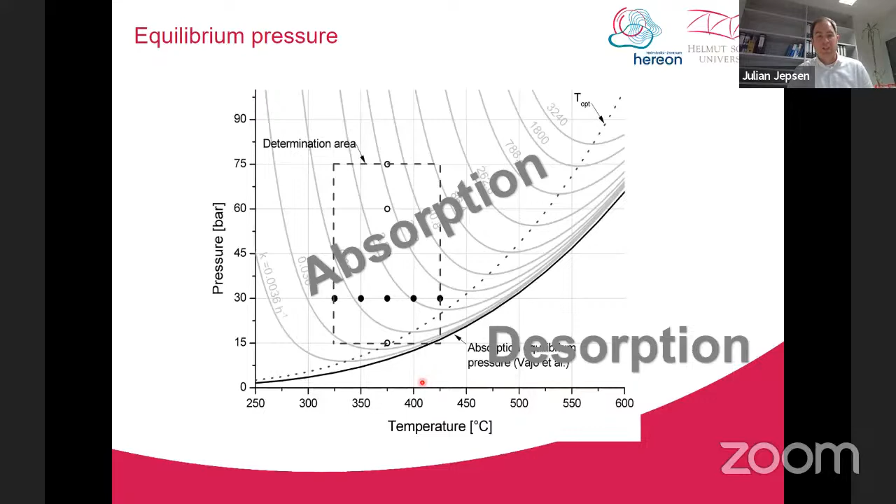So now, by playing with temperature and pressure, you decide whether you absorb or desorb your material. However, this takes place, depending on the material you choose, at much moderated pressure and temperature conditions. This is shown here for an example of high temperature hydrides. There are also hydrides that absorb and desorb below 100 degrees C.

So why is this so important? Why is it interesting? Thermodynamics is actually something we can trigger, something we can tailor. Usually a high enthalpy of formation stands for high stability and thus a high temperature of operation. So if we want to destabilize this, we have to destabilize the alloy. This can be done by elements that can form a stable compound with the metal, but not with the hydrogen.

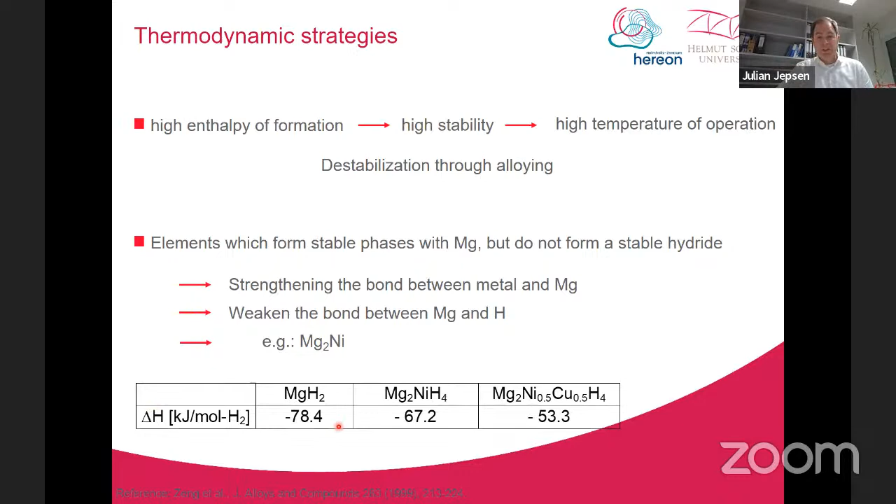So for instance, in this example, we have magnesium. Magnesium is a well-known and very good hydrogen storage material. But if you alloy some nickel, or some nickel and copper, you reduce the enthalpy, as you can see here. This reduction in enthalpy leads to a further reduction of the thermodynamic stability, which also affects the equilibrium pressure, so you can absorb or desorb the hydrogen at much milder conditions.

But this is just thermodynamics. One more example, and then I'm done with thermodynamics. You can also combine two different metal hydrides, as shown here for the example of magnesium hydride and lithium borohydride. They are both well-known hydrides with relatively high capacities. 7.6 weight percent means that if you have 100 kilos of material, 7.6 kilograms of hydrogen can be stored inside, and here it is even more than that.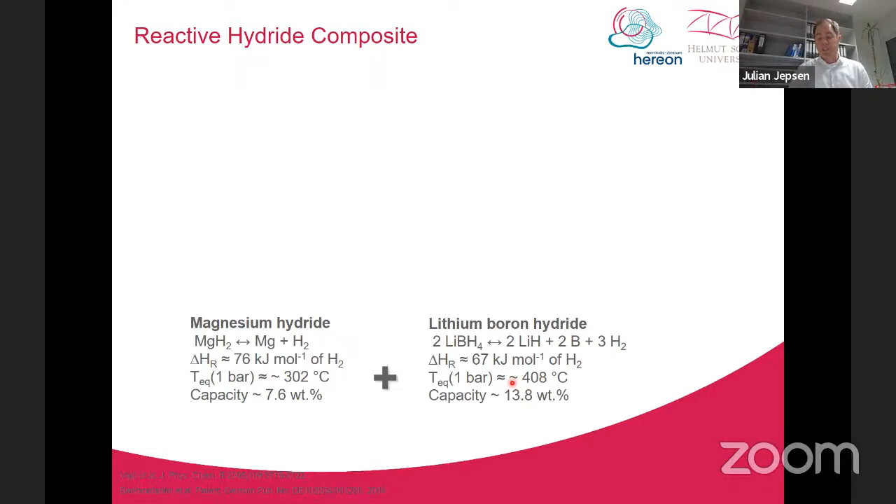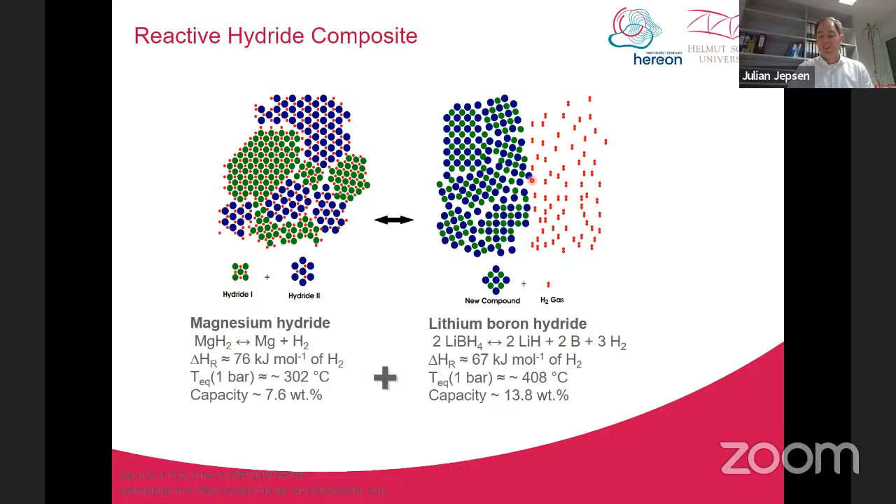However, they both have a rather high enthalpy, and are stable compounds, leading to relatively high temperatures of operation. If you combine these two hydrides, during the reaction a further reaction occurs and a new compound is formed. This new compound can take part of the energy necessary to get from the hydride phase to the dehydrogenated phase. To give you real numbers, if you combine these two materials, you end up with a reduced enthalpy, so a reduced stability, a much lower temperature of operation, and still a relatively high hydrogen capacity from the gravimetric point of view.

This is thermodynamics, and now if you want to look at a real tank system, we also have to consider reaction kinetics, because thermodynamics just tells you whether a reaction takes place and what temperature and pressure conditions you have to apply. But how fast the reaction occurs is only shown by reaction kinetics.

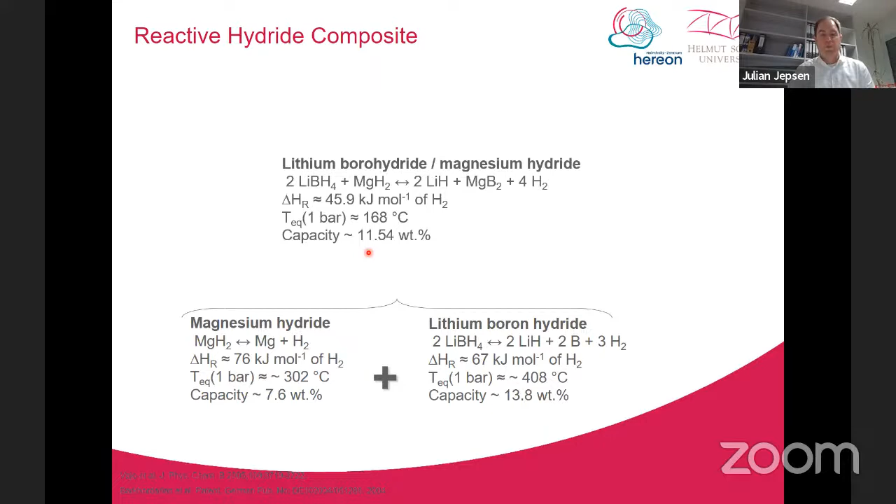But all these processes can be modified, also like we saw before for the thermodynamics, where we have the possibility to change this. The reaction kinetics can also be changed, for instance, by catalyst. By catalyst, you can quite easily improve the process of splitting the hydrogen molecule into the two atoms.

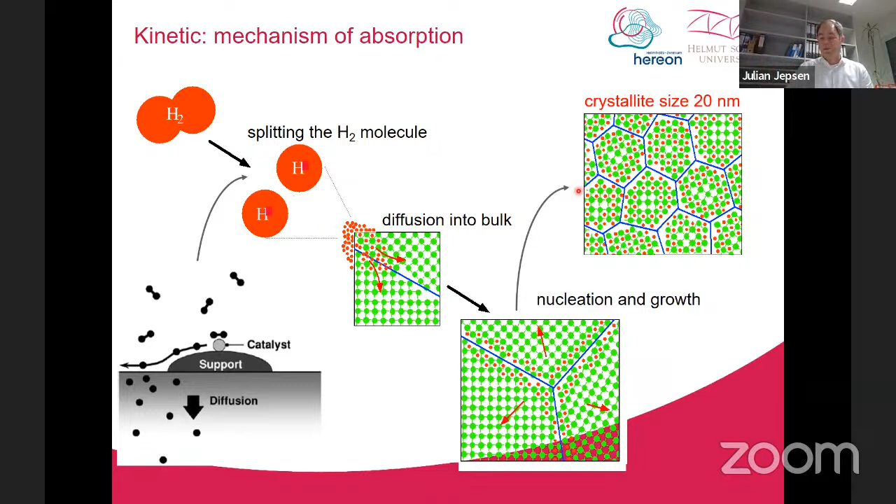But how do you get more boundaries inside the material? That's also rather simple. You apply some milling techniques where you destroy basically the fine structure of well-organized metal grid, and you end up with such a structure where you have a lot of these boundaries, and along the boundaries the hydrogen can diffuse as if there were highways.

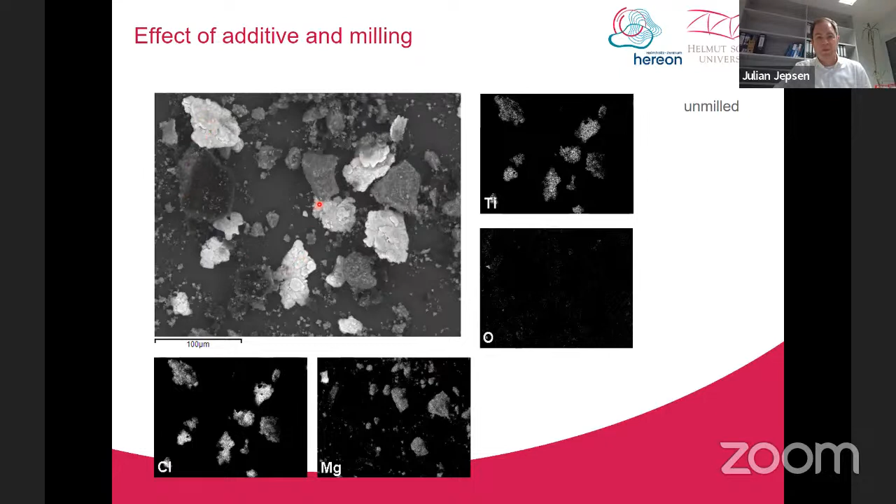A further effect of this milling is that if you add a catalyst and perform milling... this is an SEM measurement of the material before it was milled, and you see some particles of the material, some traces of titanium, which is used here as a catalyst. After milling, you have a very nice distribution.

And probably some of you remember from school or university times that a reaction of a catalyst also depends on how nicely the catalyst is distributed. So there's a further effect of the milling, where you distribute the catalyst nicely.

Milling also has an additional effect on the particle size, because it drastically reduces the particle size and leads to more surface area, and more surface area also speeds up the reaction.

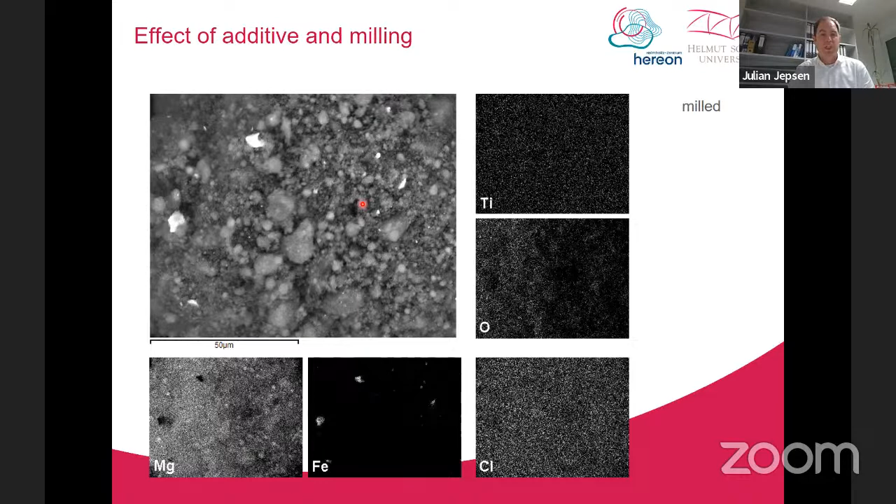So this is now my conclusion: the reaction kinetics can also be very easily manipulated. If you take the bulk material, it's very hard to get the hydrogen in, but also really hard to get the hydrogen out.

However, if you create a nanocrystalline structure with a lot of boundaries, then you can already start to absorb a huge amount of hydrogen. However, it's not so easy to get the hydrogen out of the material, but with a catalyst this can also be nicely performed. So not only thermodynamics, but also kinetics can be manipulated according to the application needs.

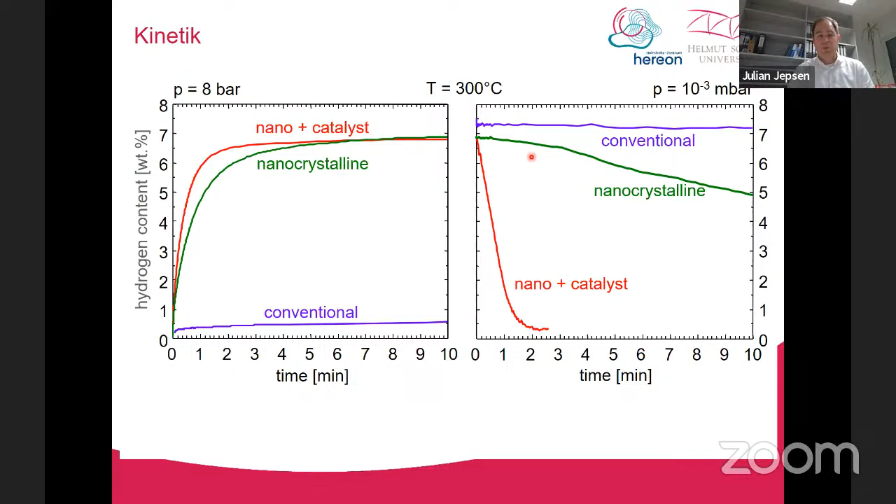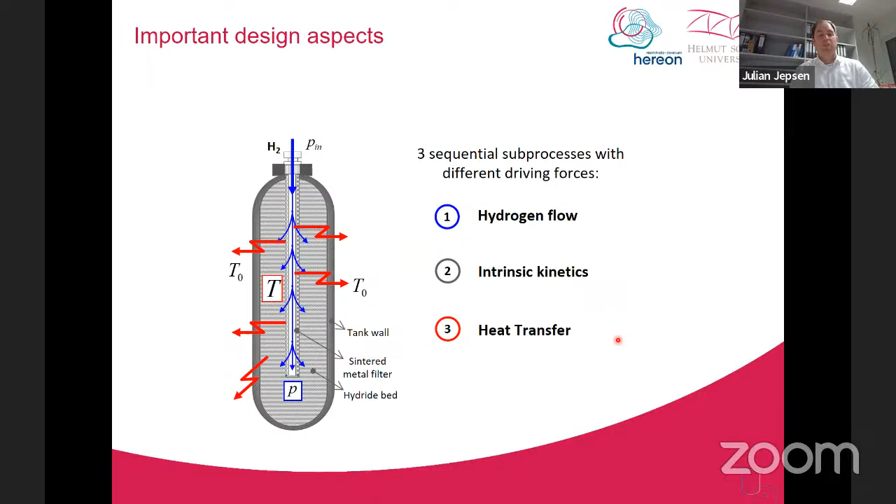If you then want to build a tank out of it - these are my conclusions and last slides - there are some processes that you have to take into account, because not only the intrinsic kinetics, the chemical reaction, matters now; you also have to make sure that you have a nice distribution of hydrogen and also a nice distribution of heat. Depending on absorption or desorption process, you have to make sure that the heat is nicely released or that the heat is going into the system.

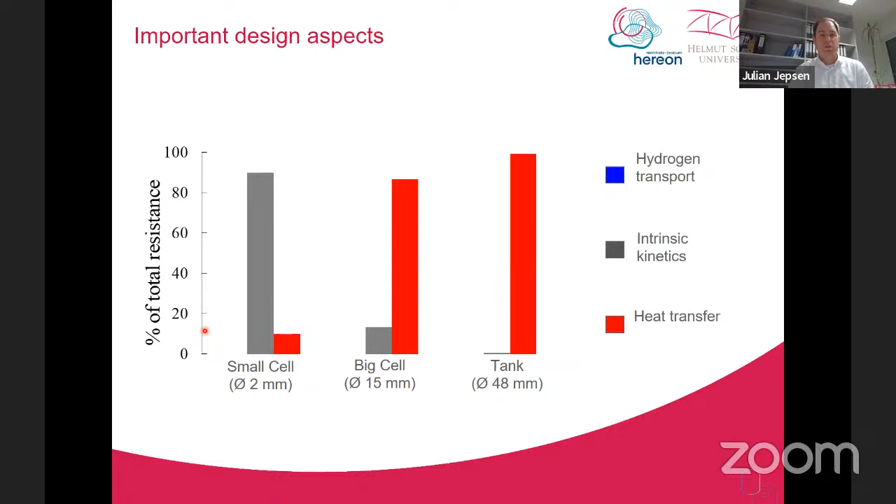This is an important design aspect, because the larger the system gets - and you see here from left to right this diameter increasing - the less the intrinsic kinetics, shown here in gray as total resistance, matters, and the more the heat transfer matters. Hydrogen transport is never an issue. However, heat transfer, in particular for larger systems, is the main aspect you have to consider when designing such a tank system.

And finally, this is really the last slide: there is also an advantage from the economic point of view, because these storage systems come with, as mentioned before, much more moderate temperatures and much lower pressure conditions. As a consequence, you need very simple tank hull structures, without any composite, without any high isolation. So you end up with a clear advantage.

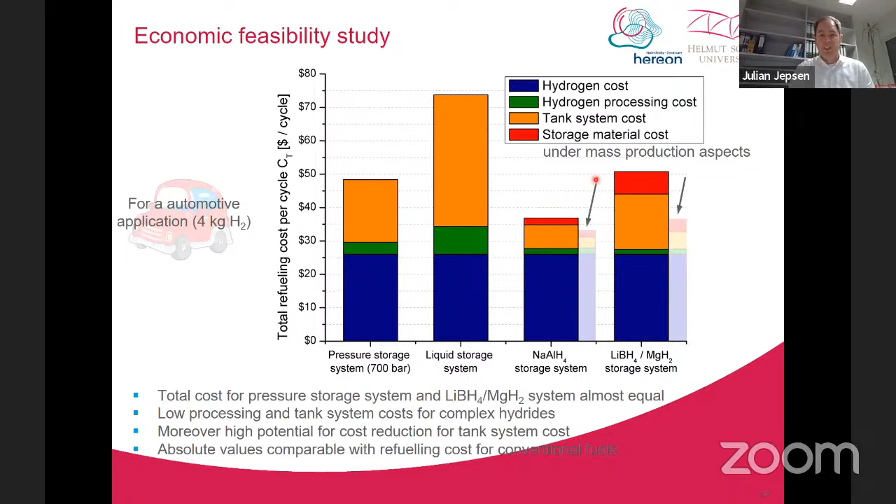Julian, thank you very, very much for this very nice presentation. Now I really get a clue how the metal hydrides work, and I get an update about thermodynamics, which was the most beloved part of my studies, honestly.

Okay, I'm just kidding. Gentlemen, thank you very much for these three very interesting presentations. We are already quite advanced in time, so I would like to make it short tonight with the discussion, and maybe we can make two or three rounds.

The first round is this: when we talk about the possibilities and the role of storage regarding metal hydrides and salt caverns, how do you see the role in the next 10 years of these storage possibilities within the energy system? Where do you see the most important application areas within this storage inside the overall energy system?

Maybe we can start first with Mr. Bültemeyer or Mr. Laporta, it's up to you to decide how you see it from the salt cavern part, and then maybe you, Julian Jepsen, can give an update about where you see the role, the possibilities, and the markets for the metal hydride systems.